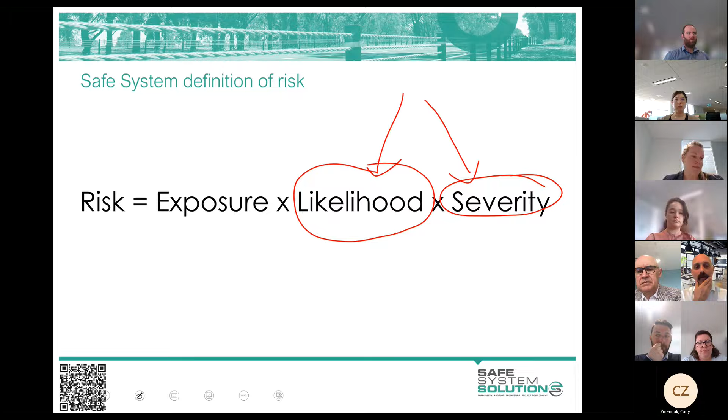But in individual intersection style thinking, exposure is usually around blocking off vehicles entering, diverting them to safer intersections or separated facilities. I remind you, especially of that exposure one which is a bit hard to get your head around, but it's really trying to remove the conflict point altogether by blocking an intersection or a level crossing or a point of conflict, or separating with full separation.

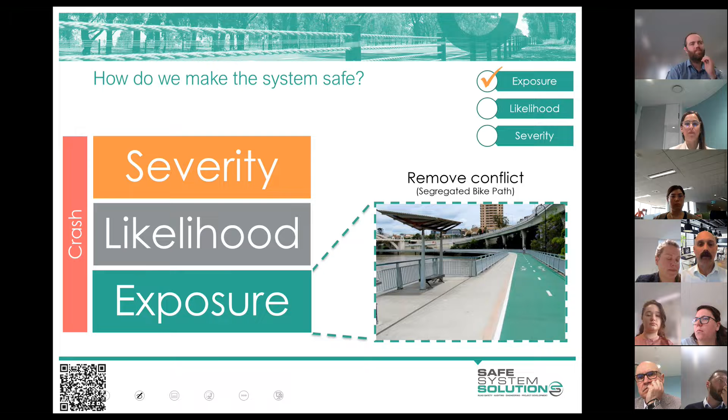That becomes important when we think about vulnerable road user safety and active transport, and how they interface with safe system thinking. I'll talk to you a lot about that in the next hour.

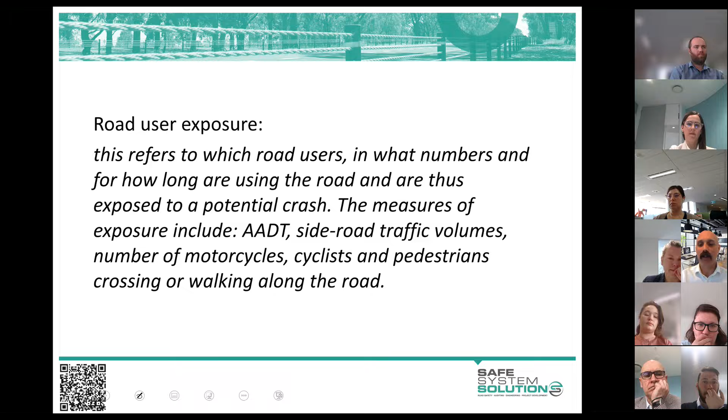This is more when we get into safe system assessing, which will be when I come down there in person and we go out and do it. There's a bit more specific clarity around the definition of exposure, but I'm happy to leave that for now.

By the end of this module, we want to connect movement and place thinking with safe system thinking. Movement and place I'll explain to you shortly, but it's really a good way of thinking about transport planning, and it's the way that a lot of jurisdictions are going. How that links with safe system is important, and we can ride the coattails of movement and place, I think, to get some really great safety outcomes.

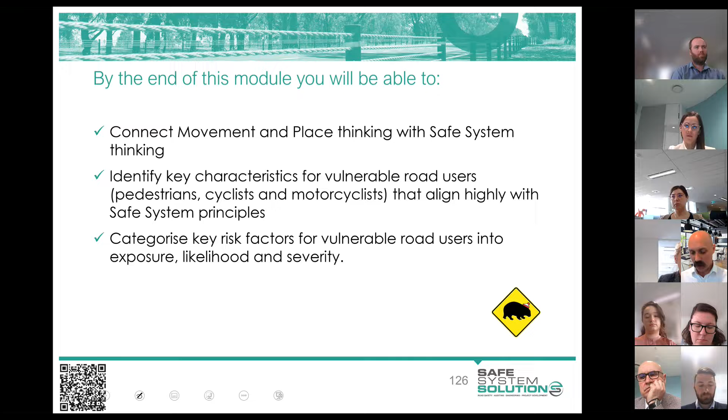We want to identify characteristics of vulnerable road users that align highly with safe system principles, and categorize key risk factors into their exposure, likelihood, and severity. That's the plan today. I'll start by explaining movement and place to you, and then I'll get you to do a little bit of thinking yourself.

Movement and place is a concept or framework for strategic planning of a road network. It's probably best described with a diagram. I picked one of the many movement and place framework charts out there because I think it explains things quite nicely. It's all a similar concept, with slight tweaks and terminology changes.

The idea is that roads and streets were originally developed for movement. We were trying to move people and goods from A to B, so we built roads, streets, and highways. But over time they build up into something more than just a movement corridor, and then they become what we call a place.

There are quite intense definitions of place around, but it's really associated with interaction, community interaction, trading, socializing, people gathering - bars, shops, cafes - all of these things add to that place value. This is thought about at a community level, so it's not an individual's perception of place, it's more that economic vibrance and all those sorts of things.

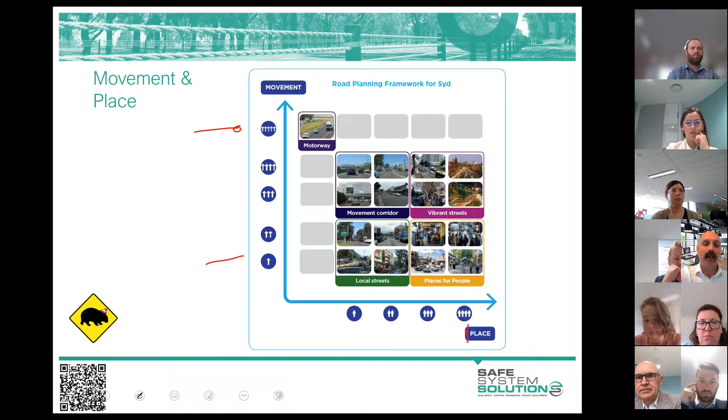When you look at any part of a road, like any street or road within Tasmania, you should be able to get a general idea of where it would sit on a movement and place framework like this. On the y-axis we've got movement importance - really high over here, and really low over here as a strategic objective. On the x-axis we've got high place value and low place value. You find a spot which meets each of these.

The easiest one to explain is your motorway. A motorway is very high movement function, and it is not a place. It is very much not a place where we want trading, interaction, socialization, those sorts of things. So that's a very obvious one.

But the thing is, it's not about movement of cars, it's about movement of people and goods. We could equally have replaced that with a bicycle superhighway - a completely dedicated bicycle route going from, say, the university to Hobart CBD, getting everything else out. That's a movement corridor as well. We don't want people socializing, trading, having their coffees on there, because it's about moving the bikes along as quickly as possible. So don't equate movement specifically to cars and trucks - just equate it to moving of people and goods.

And sometimes that can change. Let's go to the other extreme - something that is very much just a place for people, and that's really a mall. It was a street at some point, but now it's said this is for trading, for having festivals, people sitting out having coffees, and vehicles are really not welcome. If they're there, they're going very slow, or just going in to collect the bins or something. We're not trying to move people and goods through this area - this is a place for people.

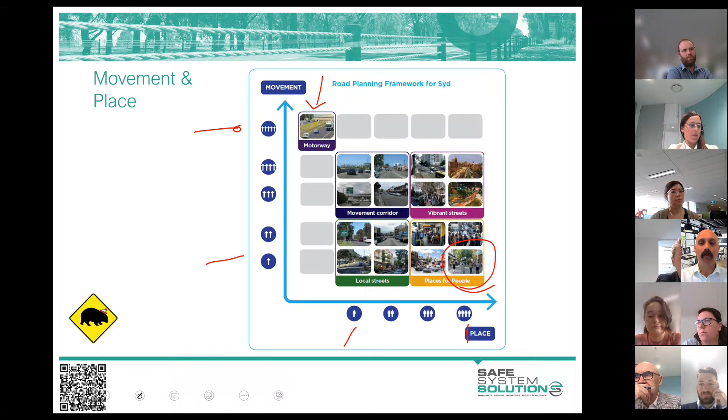Each of these categorizations has its own thinking. So these places for people - I talked about the mall - but it edges up to where there are still places where you might have some vehicles or bikes moving through the area, but you're still retaining quite a high place value, maybe trying some tactical urbanism, different things. It's really not about pushing vehicles through there as fast as you can.

So I thought, if that's the case, and we're talking about a place for people, which is down here, high place value, low movement requirements.

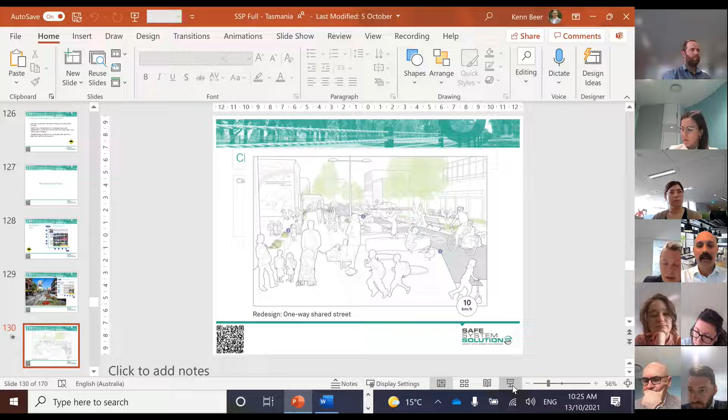Okay, let's have a think about that. I'm just going to give you a little insight into the future there - I've lost the ability to see any of you, so I'm going to try to find you again. Oh, there we go. Okay, have a think about that, I'll give you a couple of minutes to think about what you might change. Ask any questions, although I can't quite see the chat, so you'll have to unmute yourself.

Does anyone know where my chat's gone? Your chat's disappeared? Yeah. I cannot access it. Let me see. No, it's there for me and a few others, so I'm not sure what's happening. I'm just going to play around in the settings, but I am here, just so you know.

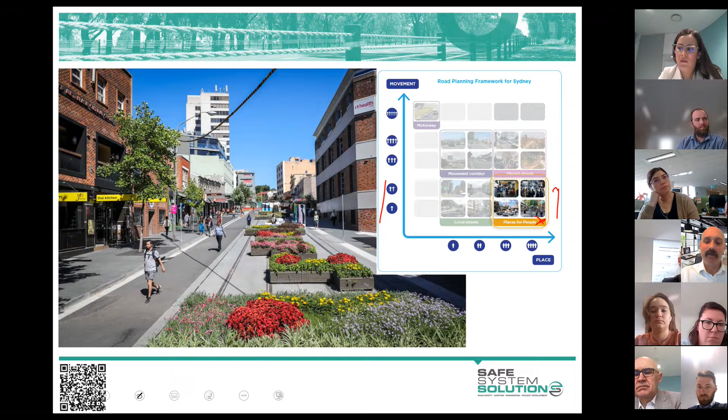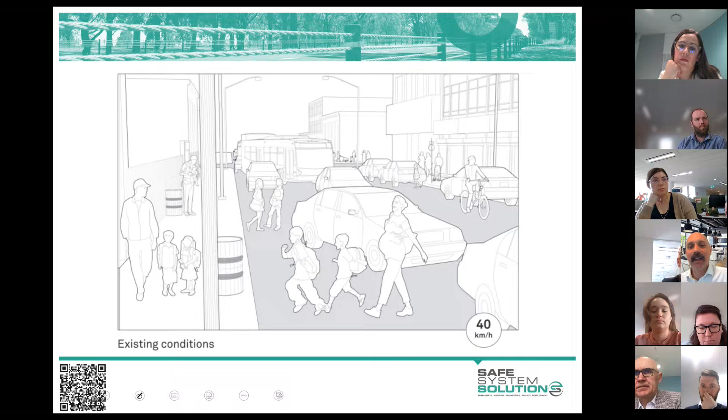The widening of the footpath is a great one, but it's still an area just for pedestrians and a road - it's got a bit of vehicle-centric inherent thinking to it. The idea of a real place here would be pedestrians being able to go everywhere easily without having to stop for any vehicles. Vehicles are the absolute rare anomaly. The area is for pedestrians, and it's not a road really - it doesn't look like that. It's got more that place value to it.

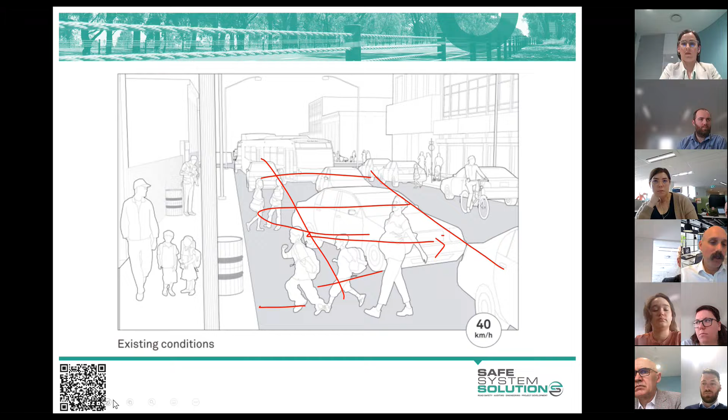If you extend the footpaths and make them wider, that's going to be really good. We'd actually say that reduces the likelihood of crashes, not the exposure. The reason is pedestrians are still going to have to cross a road if that's how you've done it, so they're still exposed to the crash - they're just less likely to be hit because they've got less time out there. So some good stuff in there as it builds up in that movement function.

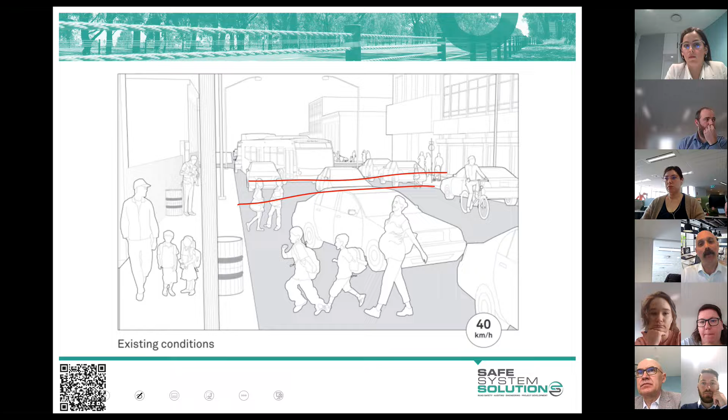It's also the same with the idea of providing dedicated crossing points. The idea of a dedicated crossing point somewhat says this is a movement corridor for vehicles and pedestrians - you shall cross at your particular point. We're trying to alter that thinking and mindset in a place for people sense, because it should be almost that the cars can only cross at a certain point or certain time, or they've got to press a button to go through here, because this is the place for people.

And speed - good, we got in there. If you are going to be moving vehicles through there, you want them going extremely slow. We don't want to encourage this as an area to travel through. A lot of these features that we know make it a much better place to go and have a coffee, to socialize, to set up a little stall, have a market - these sorts of things make it much more livable, more a place you want to go to, and it's also going to have much better safe system alignment.

But we can get much better safe system alignment in an area like this in ways that don't align with the place function - things like blocking off pedestrians from crossing wherever they want, corralling them into specific crossing spots, like pedestrian fencing. We would probably get safer outcomes with big pedestrian fences stopping them crossing and just giving them one point. But you are eroding place value by doing that.

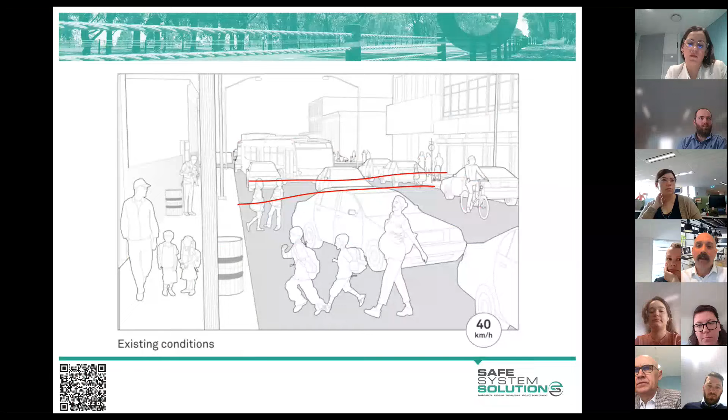So let's have a look at a few artistic impressions of this. I grabbed these out of a NACTO guide - it's actually an American guide, Streets for People. Let's look at some of the little tricks and things they did. There's a lot to like about one of their artistic impressions here, where you can see it has taken a lot of the features mentioned.

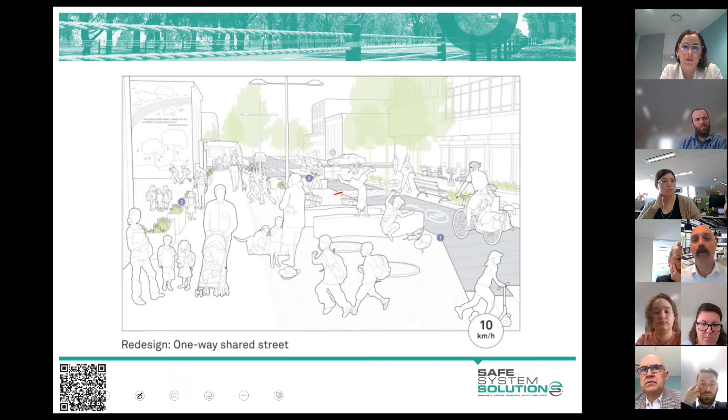It's not the full place for people because you just block all of this off. They have got a dedicated crossing point, which I'm not really a fan of, and don't think it's needed in a 10 km/h area. In Australia, certainly in Tassie, we would just do a shared zone, where pedestrians have priority through the whole area and vehicles must stop and give way to a pedestrian the whole time. But you can see there - much more livable, a nice place to hang out, to play, to socialise, and giving great safe system alignment due to low speeds, probably lower vehicle numbers - we're just having wins all round. But you're not going to move people and goods through there very quickly at all.

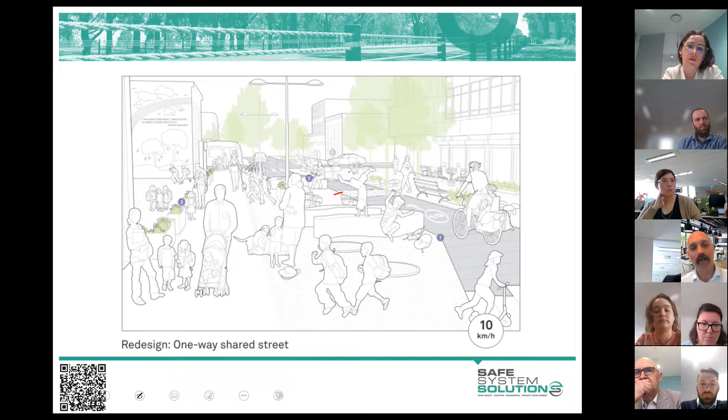If it became a little bit more, it's pushing up there, as somebody rightly pointed out. If it's got more movement requirements, that's when you start to delve into the separation a little bit, and you create these corridors

using separated bike facilities, large pedestrian walkways, and that's a movement function as well. Remember, to be able to move pedestrians through there quickly is a movement corridor as well, and public transport and some crossing points. So you can see we're trying to ensure that we get our safety outcomes complementing what we want to see from a transport planning land use perspective.

Any questions on that, or anybody have anything different or want to add something?

Now, one point I'd make with this, just a little inside tip, is that I find we get huge traction in road safety when we don't talk about safety and we just talk about livability. And we talk about encouraging people to walk, to cycle, to have great greenery and livability and just wonderful places in the city. Now, by default, we get safety out of those.

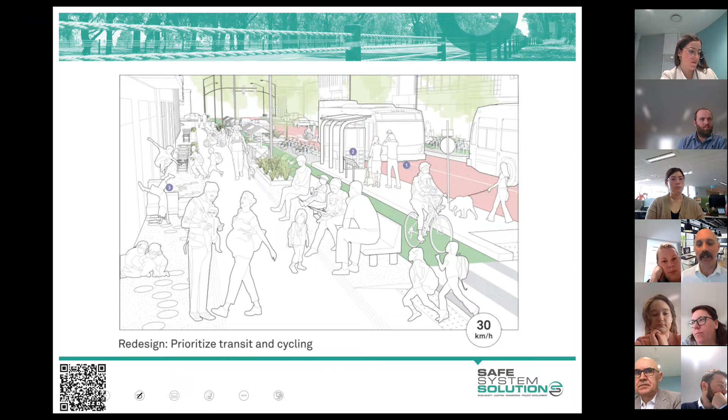When we look at the local streets, which is the next category along, this is where we've said this has low place value and low movement function. Now, it has some movement function usually because it's access to local, to people's houses, or it's very local access style stuff, not moving through the area with people and goods.

and it's got low place value. I certainly don't, if you're out there doing stakeholder consultation with people on these, don't tell them that their street has low place value. They don't like that. But we're thinking about it from a holistic perspective of the state, everywhere, all the roads, we've defined it as low place value.

But when you get yourself in these, and you're in this balanced trade-off between movement and place, it just happens to be low in both in this case. The prioritization of the most vulnerable becomes our priority.

Okay, so this is where we say, well, we can and we should be having very low speeds. We should make this a very awkward sort of access when you're in your car. And that's because we're not trying to get people through there very quickly from that perspective. In fact, we actively want to discourage them from ever going through there and rat running. And that's not what we want.

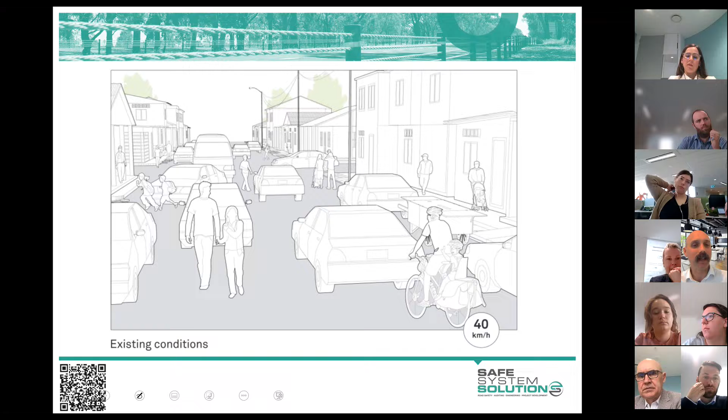Here's another picture, but it's probably got a lot more going on than you really would for a lot of local streets. But again, we see a lot of similar features where we're providing those larger sidewalks or footpaths. We're providing much lower speeds. We've got more movement function built into this, though, the ability to drive a car through there a bit easier than the last one, but we're still really slowing vehicles down.

It's going to be more livable as a result. It's going to be a huge amount safer as a result as well. But we do tend to operate and design and manage our local streets as absolute car movement style corridors.

Yeah, and we need to probably alter the way we think about some of that. Any questions or comments on the local street style categorization?

The one thing we need to do as we transition to this look and feel, which is much nicer and has got a bit of that European feel, is use local area traffic management. So that's speed humps, chicanes, different slow points, ways to slow vehicles down through an area.

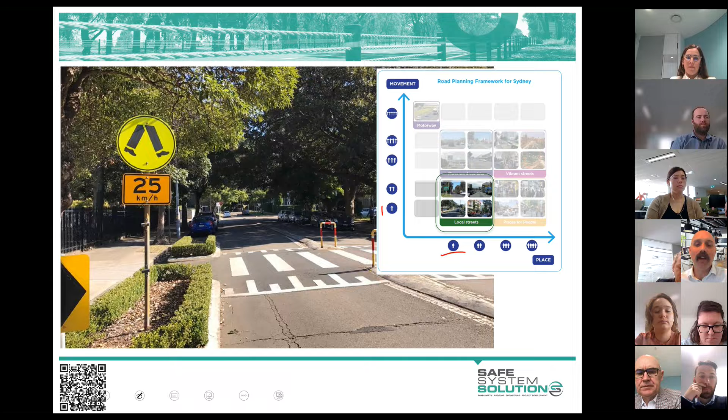Let's go to vibrant streets. This becomes the really tough category. The reason it's super tough for planning and strategic thinking is that it's got high place value, but it's also got a high movement function. So we are trying to move people and goods through there at a reasonable pace, but it's also a high place value.

These are usually your high streets, which are built up. It originally started just as a movement corridor, and then people recognized they could get some trade from these passing motorists, so they build a few shops, and it builds up around it. Now you've got all these shops and bars and cafes on this main road, because that's where people have been driving through. Now it's actually starting to become this real place to go, but we're still running this movement corridor.

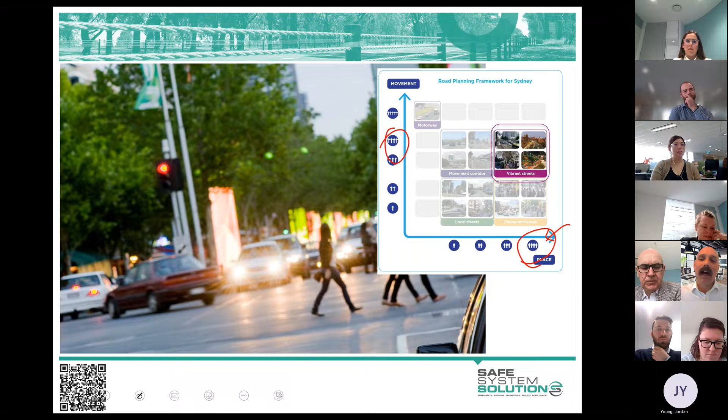Now, how are you going to transform this to give us better safety outcomes, better alignment with safe system principles, acknowledging that this holds that movement and place function? We're trying to get people and goods, not necessarily in cars, but cars as well, through there in a reasonable fashion, while retaining as much place value as we possibly can.

So same as we did last time, have a think about what we're going to do to alter this environment to make it better aligned with safe system principles, by either altering exposure, likelihood, or severity factors, and make it a much better place to meet up with people, to socialize, to chat, to trade, and to hang out.

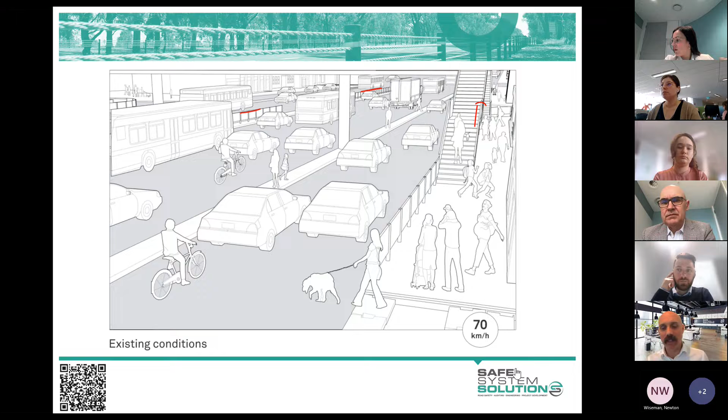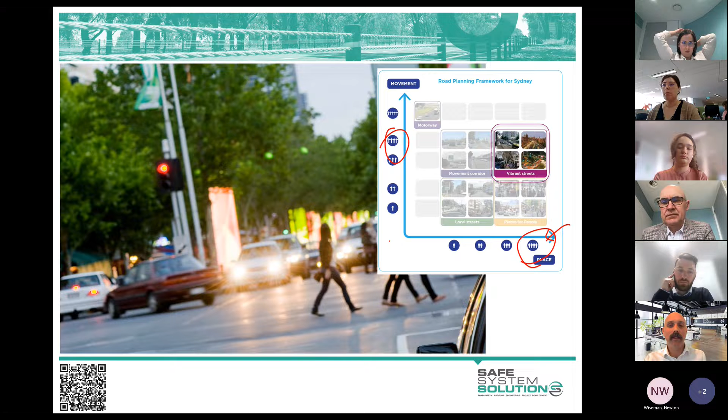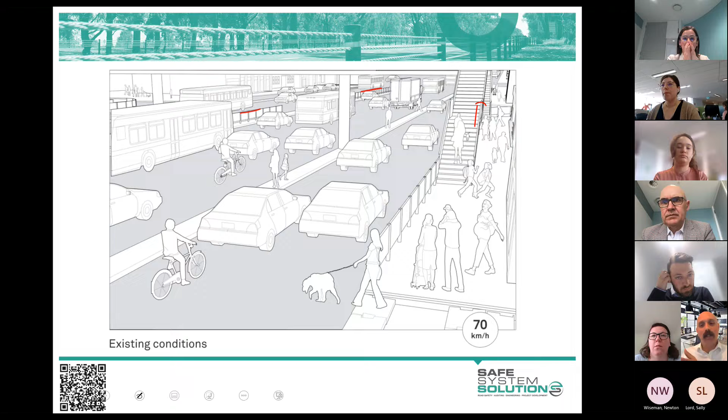So we're trying to create a feeling of place for people, but also retain or encourage movement of people and goods through here in this vibrant streets category. Going back to that category, you can see it's both place and movement. So the challenge is, in order for it to be a place for people or have high place value, the idea of corralling and forcing pedestrians to cross, or to walk up and over, erodes a bit of place value. Also fencing off pedestrians and corralling them along again erodes that. But we have this challenge because we also want to move people and goods through there at a bit more speed than usual, so we're in a bit of a dilemma and a bind there.

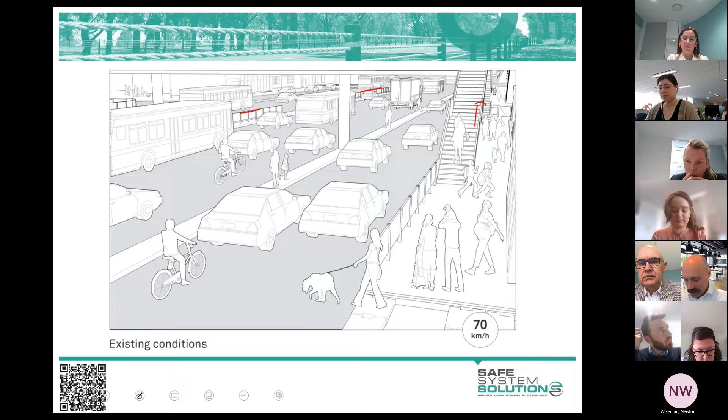But I do like the thinking people are coming up with in terms of trying to utilize that overpass, and that would really, in my mind, be more just a movement corridor, because you're actively separating out the users there. So let's have a look as we go at an artistic impression of this, and I see some of the ideas coming in aligning quite well with this.

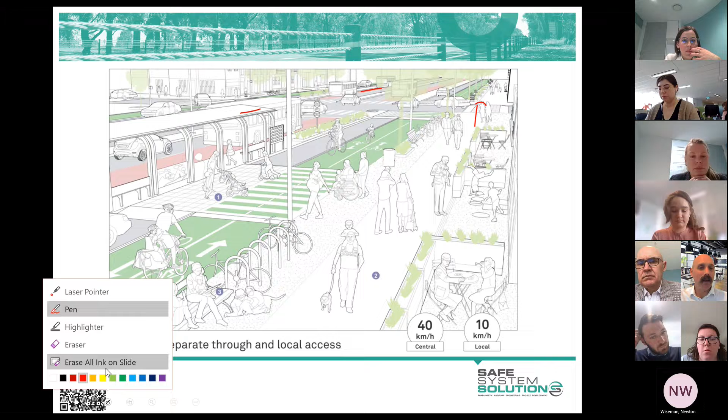But to keep that place value, really the idea of overpasses don't quite align with that. They align really well with the movement part of it, but not the place part of it.

So you can see there again, widening of footpaths and those sort of things, but big investment in your movement corridor through other forms, being public transport, cycling, and the like. So not just passenger vehicles, and more greenery and more livable.

There are more dedicated crossing points, as in it's sort of encouraging and formalizing where crossing will happen. You can see there the speeds, and this often surprises people, that we're down at around 40, even though it's a movement corridor. But again, it's movement through there in a reasonable amount of time, acknowledging the place value is still high.

So we're trying to find that right balance, and it also aligns quite closely and quite well with our tolerance to physical force. I mean, it's not quite at our 30 that we'd like, but you've got that movement function happening in the central sort of areas, a bit further away from where there's more vulnerable road user activity and that separation.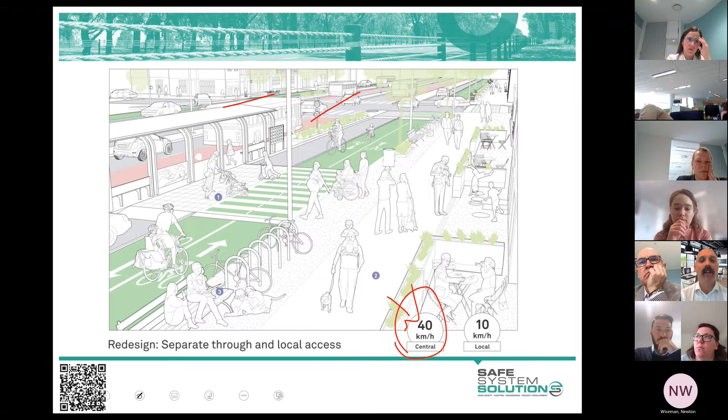Now, I suppose this presents the challenge of how do we get ourselves to these environments in these sorts of streets. I don't know which ones in Hobart or in Launceston you'd consider the ones with high movement, high place value, maybe a Davey Street or the like, where it's going through areas with lots of excitement and activity, and you want to build that and make it more livable, but you're still trying to move vehicles through there. And it is going to also come with some mode shift, and are we ready for that?

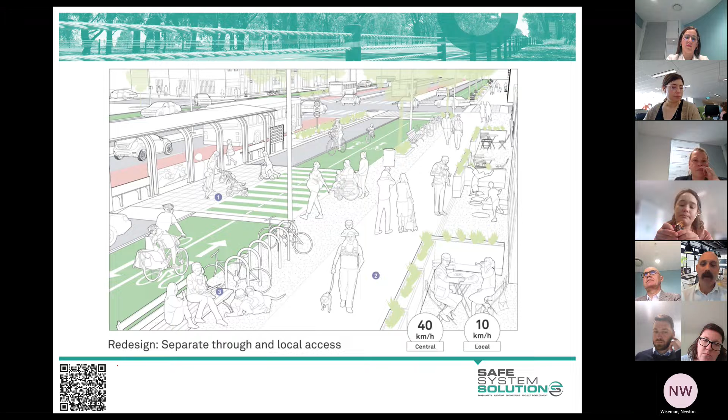Well, I think that's a long-term sort of change that we're looking to make happen. There are sort of artistic impressions that always make things look easier than they are. But there are different ways that we're starting to recreate these streets.

Providing those dedicated bike facilities, so you get that movement for bikes, but you can continue to get good place value and separated intersections like this that are coming along online. Sort of separated bike facilities like this would continue your movement corridor quite nicely. Not adding a huge amount of place value, but it's starting to build and improve that.

Questions or comments on that at this stage?

Okay, I'll just check the chat there. Yeah, so some good ideas coming in on the chat there as well. So thinking along the right lines there.

When we think about a facility like this, in terms of does this change the exposure to crashes, the likelihood of crashes, or the severity of crashes? I tend to place this in the likelihood of crashes. The reason I do that is because you might be tempted to say, well, they're not exposed to crashes. I kind of feel that they are exposed to crashes from the entering and exiting vehicles, and also the fact that these curbs, it'd be quite easy if a driver was distracted that they could mount that curb quite easily and enter the bike lane. It's much lower likelihood that that's all going to happen, but it's still sort of a potential exposure there.

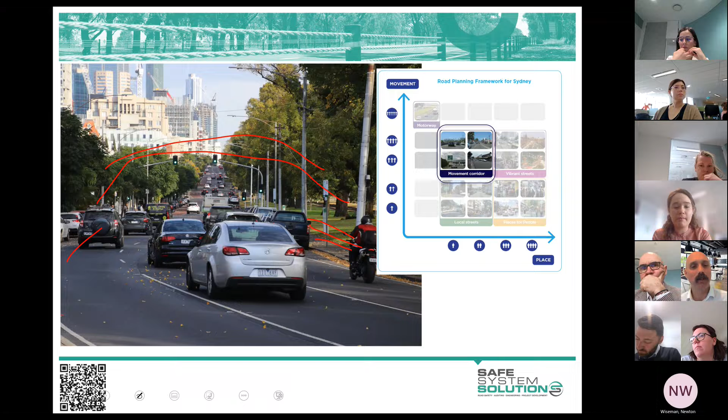But inevitably we end up with these movement corridors where they do cross other roads or areas where pedestrians cross, and then you need to get back to managing your speeds to tolerable energy levels where these conflict points occur.

So here's another example of a very big movement corridor, and it's very much a traffic route. It's about moving vehicles through there. It crosses another traffic route, and there's a little bit of pedestrian activity as well. So this is where we're starting to look at those raised intersections, slowing vehicle speeds down, and trying to keep them moving mid-block, slow them down at these big conflict points, dangerous, high-risk spots, and have them speed up again.

Ideally, if this is a movement corridor, we would have grade separated this. And when I say grade separated, that road would have just continued over, like sort of almost starting to get into your urban motorway style. But the costs and challenges associated with that usually restrict us.

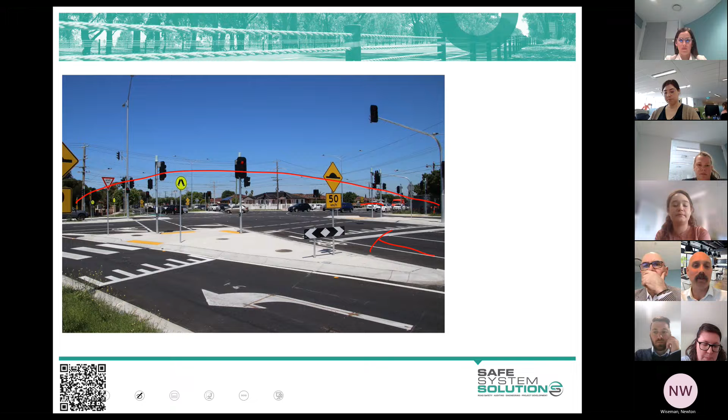So when we think about pedestrians, that's probably a very brief introduction to movement and place thinking and alignment with safe system principles. But I do come back to the point I made earlier, that we can get safety under different frameworks, and in some instances and with some groups we'll get far better traction putting it that way rather than through pure safety reasoning for doing things.

It also can work quite well, as I mentioned a couple of modules back, in terms of outer areas where we're trying to manage speeds down a little bit, thinking about how we might do that through reduced carbon dioxide emissions, meeting different greenhouse gas targets and those sort of things.

The optimal driving speed for most petrol vehicles is around the 80 km/h mark, in terms of getting the most distance for fuel. Going at 100, you burn more fuel than you get, and going lower, you're burning less fuel, but you're not getting as far.

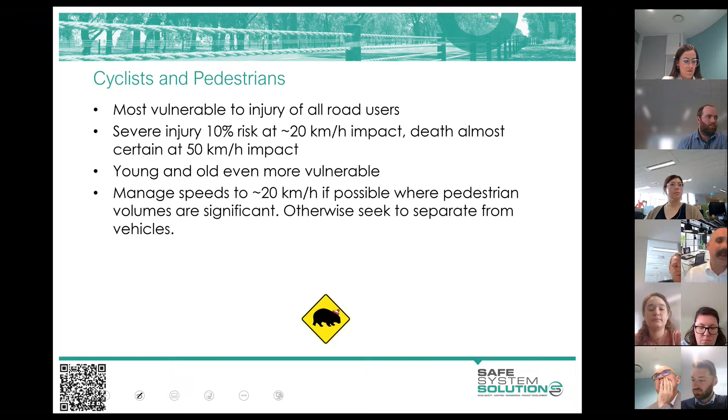Young and old are even more vulnerable, obviously, so ideally we're managing speeds around 20 km where there's significant pedestrian volume. And we want to separate - separating's good if we want to keep vehicle speeds up. Separated bike facilities are becoming more and more prevalent, and there's more work going on in this space.

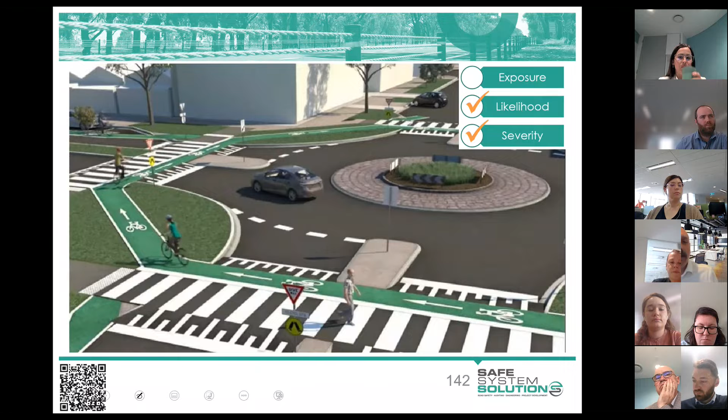We talked about the advantages of roundabouts before, but roundabouts don't tend to give as good advantage to cyclists or pedestrians. There is some research showing pedestrians actually get quite decent safety benefits from the installation of a roundabout, but it really inhibits permeability. Pedestrians don't like to cross near roundabouts - it causes other challenges from that perspective.

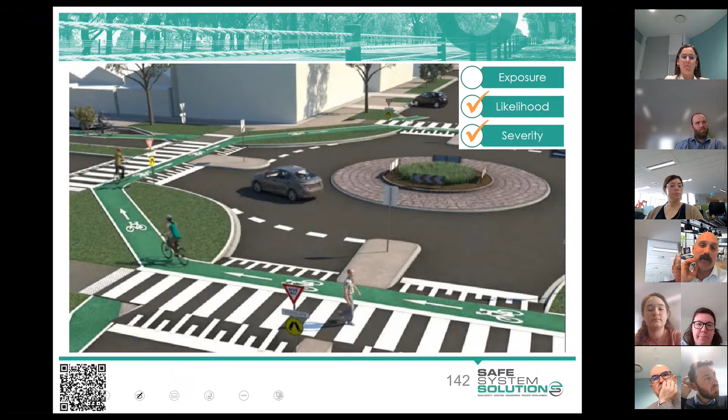So what can we do to encourage and make roundabouts better for pedestrians without ripping them out and causing other challenges? This is where we start to see different innovative intersection treatments for roundabouts catering for pedestrians and cyclists. This is an artistic impression of Moray Street, a roundabout - first of the protected roundabouts, as we'd call them, that was implemented and built. The idea being a cyclist approaching goes off-road onto these raised areas and can go around and do their turn that way, and off they go. It also has protected pedestrian facilities as well.

Now, I think we're going to see a lot more of these in urban areas where we're trying to encourage walking, encourage cycling, and we will get the safety outcomes accordingly.

It also becomes an interesting way to think about managing larger roundabouts and more challenges where we have 2-lane roundabouts and higher speed. So maybe you've got a main highway coming through here, crossing a major road. The theory still applies, though these haven't been trialed yet.

Nobody's quite out there doing this yet, but the idea is similar. You could get a cyclist off-road, have their dedicated facility through, and then they could join back. You're just trying to remove the vulnerable road user from that area of high complexity and vehicles turning over. So a bike rider wanting to turn right would come in and stage at a crossing, then off they'd go.

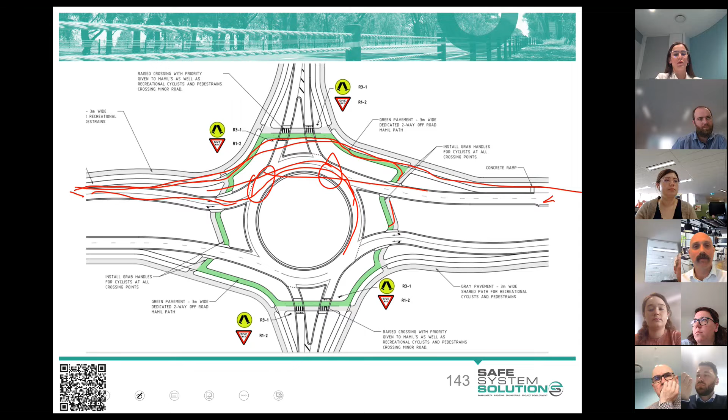The idea is the same lane space could be used by cyclists or vehicles up to about 30 km/h, because that's the tolerable limit for speed and energy for vulnerable road users. Now, the theory of '8 to 80' is that if you design your road network for an 8-year-old and an 80-year-old, you cover everything in between. I don't think a 30 km/h shared space is really conducive for an 8-year-old - you wouldn't send your 8-year-old out to muscle it with trucks and four-wheel drives.

The safety's decent, but we draw a limit around that for sharing. Then we actually start to physically separate - raised separating curbs, or you can push your parking out and have cyclists go the other side of the parking, using the parking almost as a barrier between the other vehicles. You run different variations of that up to higher speeds, around the 70 km/h mark, and then it's a fully separated facility.

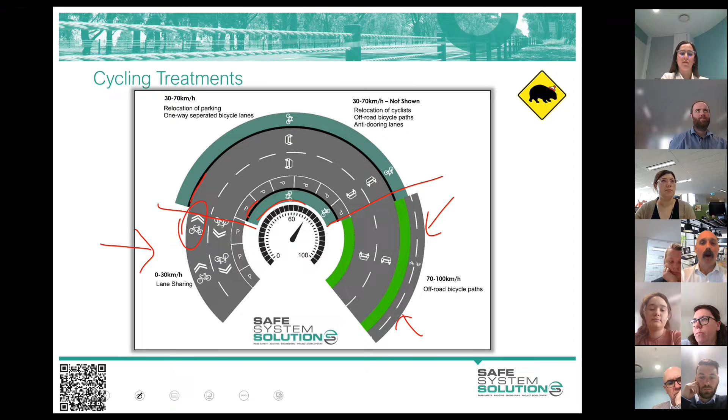But there are different things people are working on - different times of day for prioritization of training cyclists, areas with variable speed limits that go down, and even blocking off roads at different times of day, acknowledging that from 4 or 5 in the morning till 7 on Saturday and Sunday it can be a road that is a cycling training route. We're not trying to move vehicles through there at high speed - it's very low impact on the vehicle traveling public. So there are ideas like that popping up, and people are trying different things.

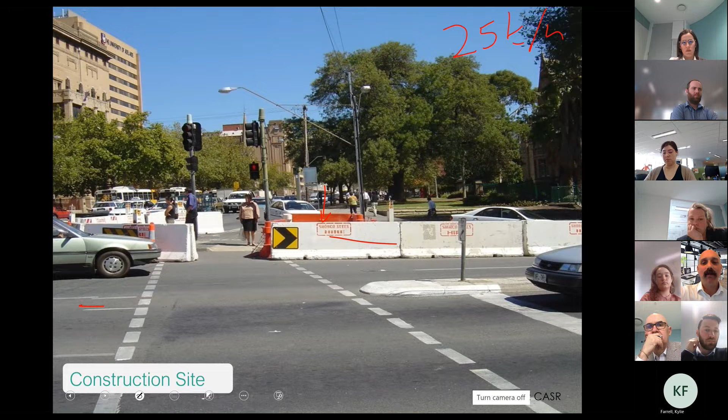And so in South Australia, they have a 25 kilometre per hour speed zone for work sites. That was implemented - the road back in the day was 60 kilometres per hour, but it's now down to 25. They put the barriers out in case somebody is distracted, so they won't hit the workers. And they proceed to go about doing all their work, and then they finish, pack everything up, and it goes back to 60 kilometres per hour. And then about 3,000 pedestrians a day stand in pretty much exactly the same spot that the workers were.

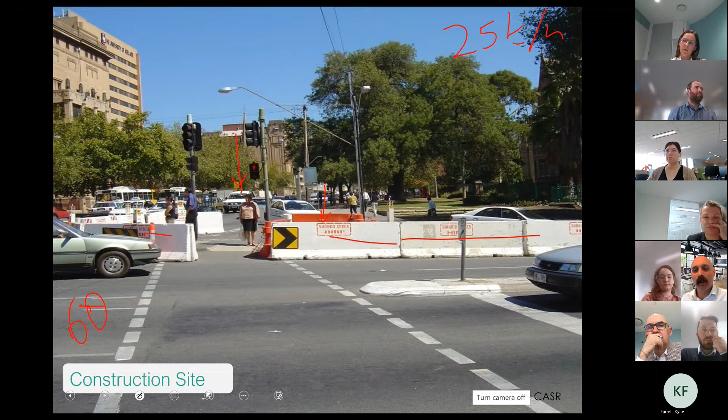The reality is that we create a safe system for the workers, but we don't afford that same level of protection to the travelling public. People might often say, well, the workers are concentrating on their work, they're not looking around for vehicles, so we need to provide protection. Well, the reality is that a lot of pedestrians are looking at their phone, they're intoxicated, they're running to get the bus. So they're taking extra risks too, and they're at very high risk as well.

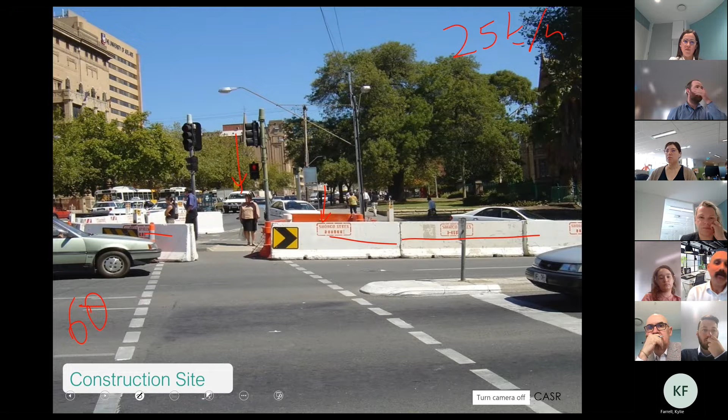So really, I come back to that point that we know what a safe system is, and it's pretty much workplace health and safety. That level of safety that says it's unacceptable for any worker to be killed going about their job. Well, the safe system says it's unacceptable for anybody to be killed going about their travel, and we should alter and change our system accordingly. If you're ever asked in a short amount of time to explain what the safe system is in terms of the road environment, just say workplace health and safety—it's pretty much that level of safety, thinking, consideration and value given to everybody travelling around.

We see improvements in some of this, and we're seeing more protection in different areas where vulnerable road users are in higher speed road environments. One interesting study I was looking at recently was around the massive increase in risk associated with anywhere there is public transport. We run a lot of trams, as you know, in Melbourne, and any route that has a tram on it has double the pedestrian risk of a non-tram route in the same sort of environment.

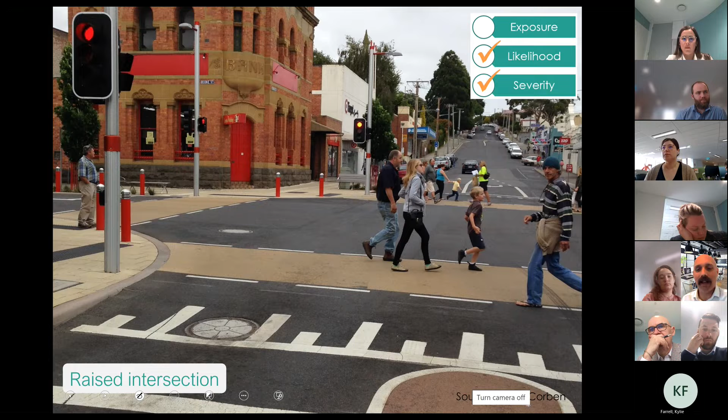Here's a Tassie example, a nice one there in Devonport, isn't it? You see some wonderful features—raised points where we've got pedestrians crossing, raised facilities. It's going to get beautiful safe system outcomes because the speeds will be lowered for pedestrians, for cyclists, and for vehicle-to-vehicle crashes, especially by breaking up that straight run without any vertical deflection.

We're looking to raise different crossing points. We call this a threshold treatment, where you raise the entry as you're walking along a footpath, so you can cross without deviating too far off your travel line. You want a raised crossing point so it's very clear for drivers turning in that pedestrians are crossing. It's all about reducing the likelihood and severity of crashes as pedestrians cross the road.

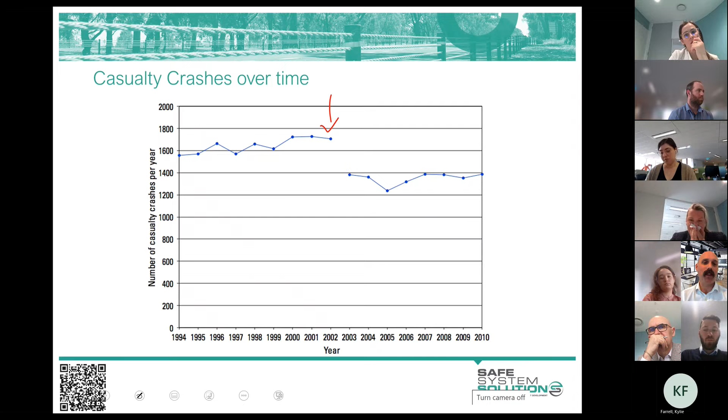Right, any questions on pedestrians, cyclists before I have a brief discussion about motorcyclists?

Okay, so let's have a chat about motorcyclists. Actually, I'll just stop that to check I haven't missed anything. Yes, some chat about Davey Street there. Very good.

Are any of you motorcyclists? No. Craig is. Of course Craig is. I've seen his Vespa scooting around Hobart there.

Let's have a chat about motorcyclists generally. Before I jump into some of the ways to think about motorcycle safety, the challenge we've got is motorcycling is our most overrepresented road user group in terms of trauma. Now, overrepresented—I mean for the amount of vehicles there are and the amount of travel being done on motorcycles, the amount of death and serious injury is staggering.

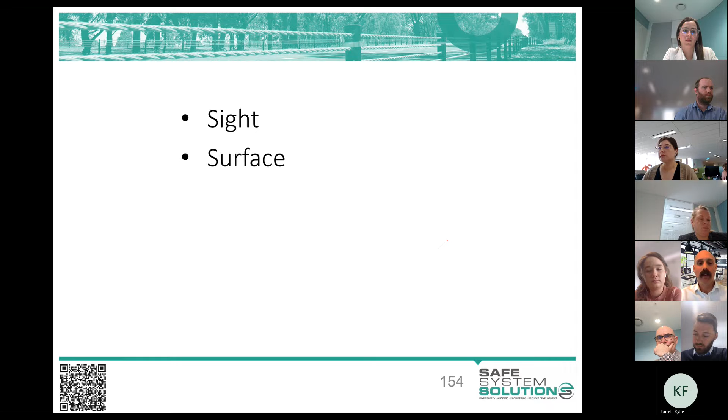But let's talk about roads first and motorcyclists. I like to think about these 5 S's: Sight - can you see a motorcyclist, or can a motorcyclist see what's coming up? Is the surface appropriate? Do we have good signs to warn, to inform, to guide? What will a motorcycle hit when they come off the bike, or what is going to hit the motorcyclist? And what are the speeds of travel?

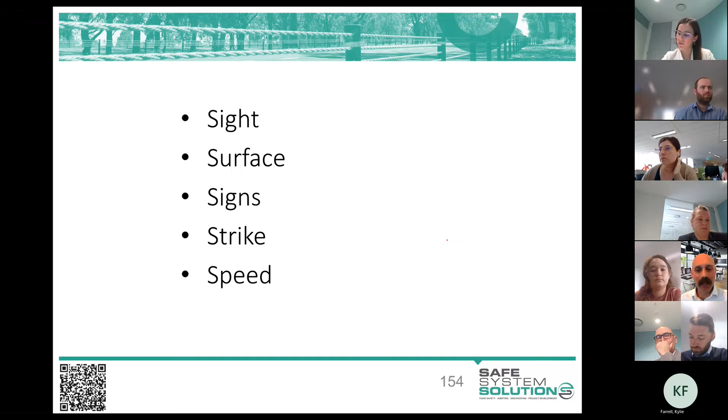When we look at those in terms of likelihood and severity, we see that sight, surface, and signs are sort of likelihood factors. The strike is the severity, because the crash is now happening - how bad is it going to be? And speed is that magic thing in road safety, where we influence both the likelihood and the severity of crashes, because at lower speeds you've got more time to react, more time to evade, so there's less chance of a crash happening. But if it does happen, it's less severe.

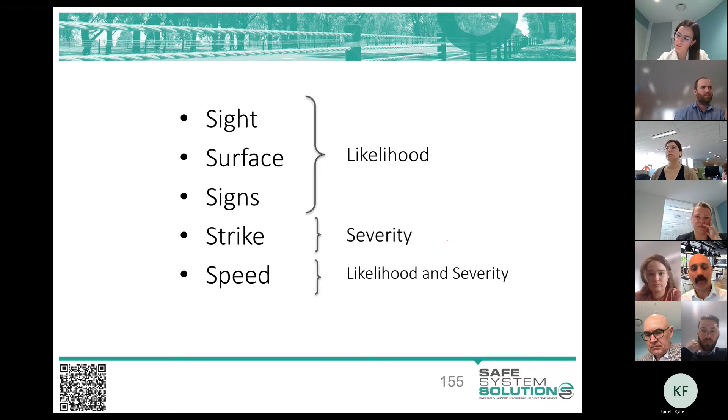There's some really interesting research that just came out a couple of years back on motorcycle crash injury curves. Remember we've been talking about those curves and chance of death - this gave us some more insight into motorcycles compared to cyclists or pedestrians. We used to just think of a motorcyclist as a pedestrian or cyclist just going at greater speed, and now we can see there are some shifts in this.

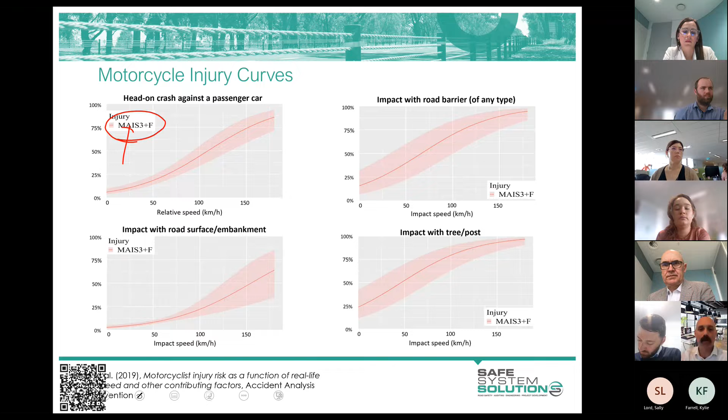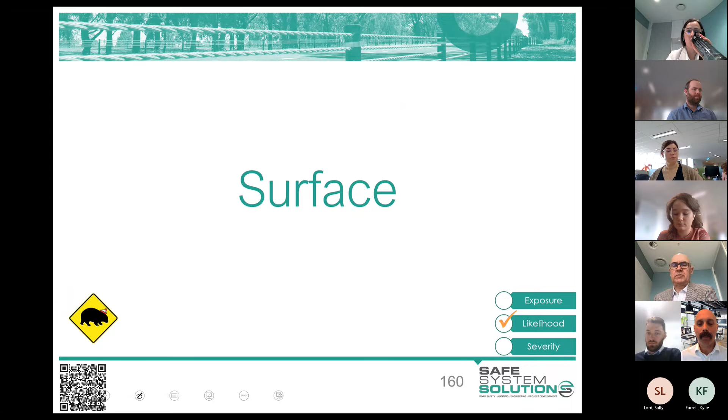We look at surface. Surface becomes really important for motorcyclists due to the fact that they've just got these two small contact patches on the road. As a rider takes a curve or a corner, they lean, so the center of gravity shifts out, and the surface becomes so critical for the rider. Any sort of surface defects, we see riders much more susceptible to death or serious injury. We often call motorcyclists the canary in the coal mine when it comes to road surfaces - they will be the ones first killed or seriously injured, indicating a problem.

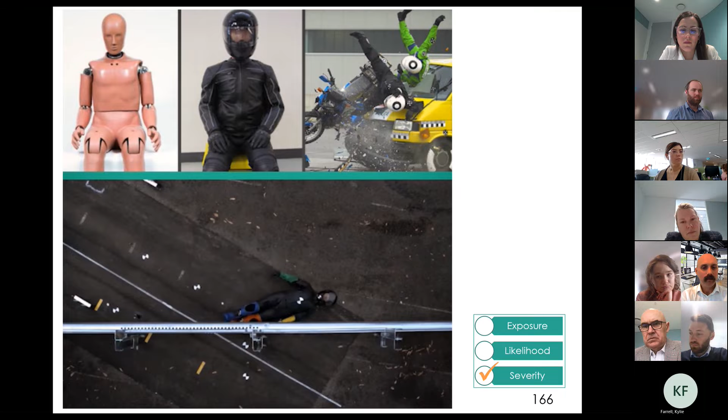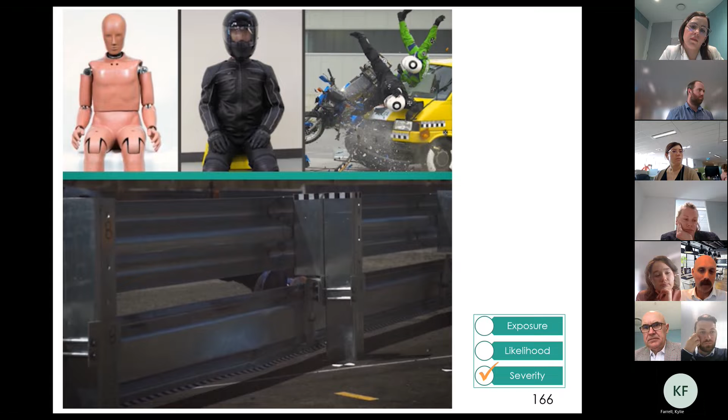Okay, so this sort of leads us into thinking about strike for motorcyclists, and if we can try to redirect energy, absorb energy, it's really beneficial. It can be very challenging to do, though.

Before I jump onto that, I just want to talk a little bit about some myths there with motorcyclists, especially wire rope safety barrier systems. You may have heard motorcyclists talking about wire rope barrier systems being some cheese cutter or something for motorcyclists. The reality is that wire rope barrier systems don't present a big risk to motorcyclists for a number of reasons. The first reason is that we don't tend to use wire rope systems in areas where motorcyclists are likely to come off and leave the road. The reason for that is we can't, and I'll explain very briefly why.

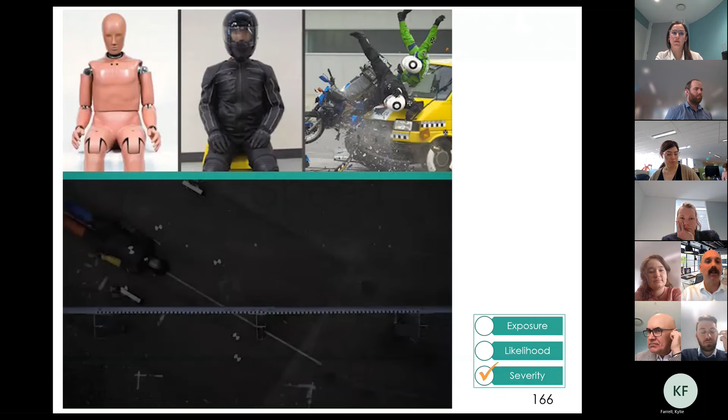The idea that somehow the wires would slice a rider is just something we've never seen any evidence of. The one point that is probably valid is that we don't really have a good retrofit device to add - like you saw in that video, there was a rail underneath, which we call a rub rail or underrun protection. We don't really have anything similar to add to wire rope systems, but we don't tend to need it because motorcyclists aren't hitting wire rope systems. I just wanted to address that in case you've heard that challenge come up, especially from Tasmanian motorcycle enthusiasts who have passionate views in this area. So it's just being aware of some of that.

Speed - managing speeds for motorcyclists is really important. If we can encourage lower speeds or appropriate speeds into curves and different areas, we see less likelihood of crashes and less severity of crashes. So speed advisories are great, and we want to ensure consistency of these across a route, highlighting curves that are out of context.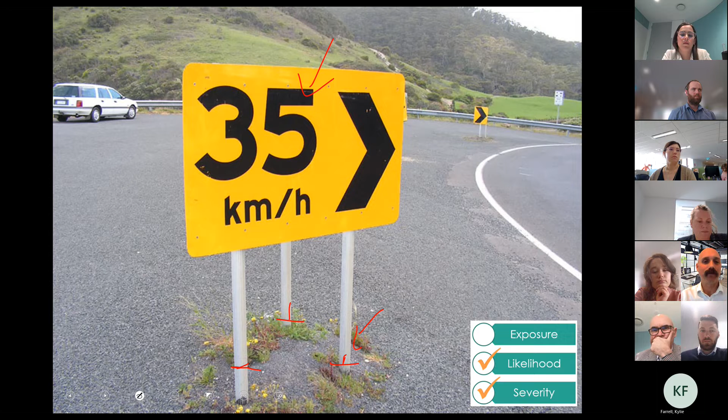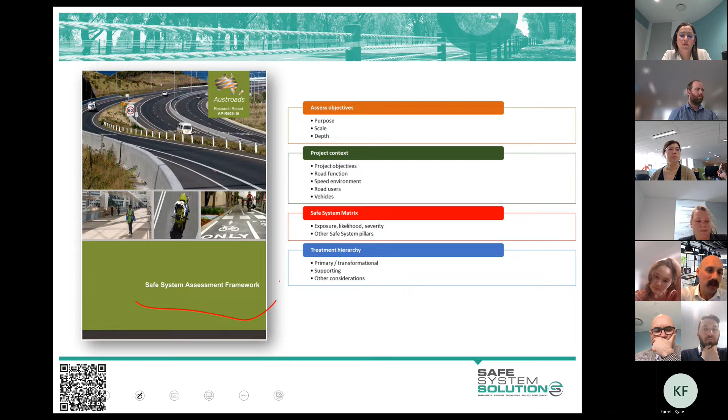The next step we usually go into is utilizing the safe system assessment framework, an Austroads process developed and released late 2016. It's a process to take the thinking you've been doing at your intersection and formalize it, enhance it, and start to put some numbers to it. I'm not going to go through this now, as that's another half day session to really get your head around how you do that. Hopefully we'll do that in person at some point when we can, go out and look at an intersection, and run it through this framework so you get an idea of it.

That's got me to a nice spot where I wanted to give you this overview of the safe system philosophy in the first couple of sessions, then delve into specific road users, have a good chat about features you see on the road network from an infrastructure perspective, and talk about speed. I wanted to use the last 10 to 15 minutes getting some insight from each of you in terms of the work you're doing, or projects you're working on or have thought about, and how they align with the thinking we're doing around exposure, likelihood and severity, or changing different behaviours.

Nothing formalised, nothing specific - I'm happy to answer questions or make comments if you've got particular things you're interested in related to the role you're doing, and I may have some insights. I may know nothing about it, but happy to chat. So, any volunteers to kick it off and give a little window into the work you're currently doing in the context of what we've been talking about over the last three modules? Or do I start to pick people?